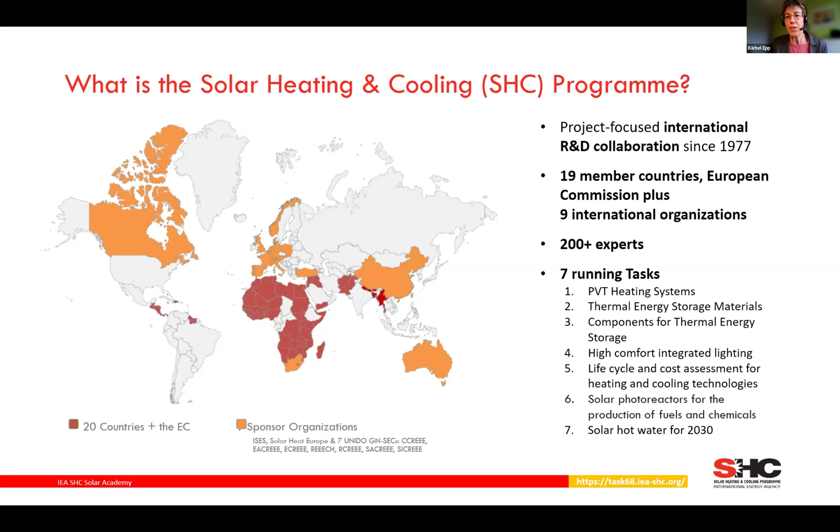Then we have a lighting task, also life cycle and cost assessment for heating and cooling technologies. And then a quite new one on solar photoreactors for the production of fuels and chemicals. And then the one which is today spending the time with us on solar hot water for 2030.

What is the Solar Academy? It's generally a platform which shares the findings and results from the research work, but it's not only reports that we publish, we also have training materials, often case studies, fact sheets, databases, and also tools, which are among the deliverables of the different research platforms.

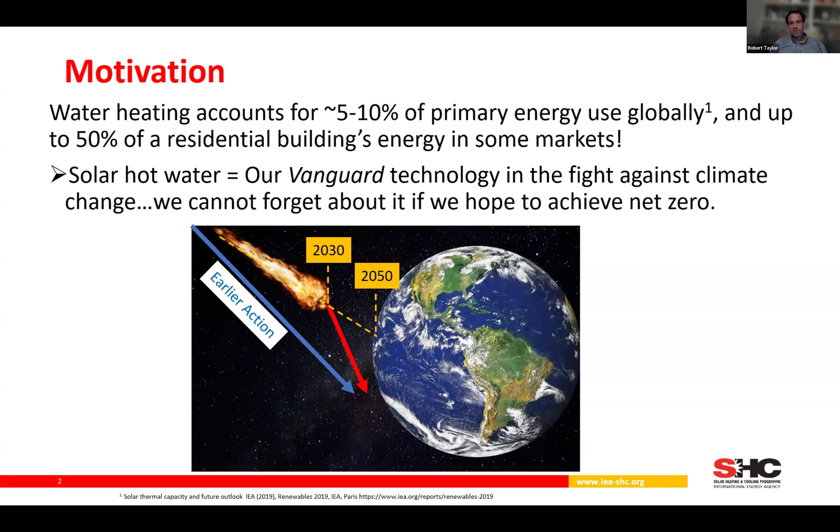If we wait longer and longer to start dealing with this problem... I've got a little asteroid-running-into-Earth picture there. The sooner we take action, the easier it is to change the trajectory. As we've gone along in the task, we've realized solar hot water has a lot of interesting applications, particularly when using photovoltaics to make hot water. There's some interesting interaction with other things—when you get to really high levels of photovoltaics on the grid, hot water is an interesting opportunity for storing excess PV electricity during the middle of the day and making sure it gets used rather than curtailed and turned off.

Another part of the motivation, and the reason we picked 2030 as our target deadline, is that it's pretty near term. There was an IEA report saying that if we want to get to net zero by 2050, we need something like 400 million dwellings around the world with solar thermal on the rooftop. Business as usual, unfortunately, for solar thermal technologies is starting to slow down a bit. So we thought, a couple years ago, this could be a good time to have a task to fill that gap and re-accelerate solar thermal and solar PV for hot water technologies.

At the same time, there are a lot of national and international targets that have something around the year 2030.

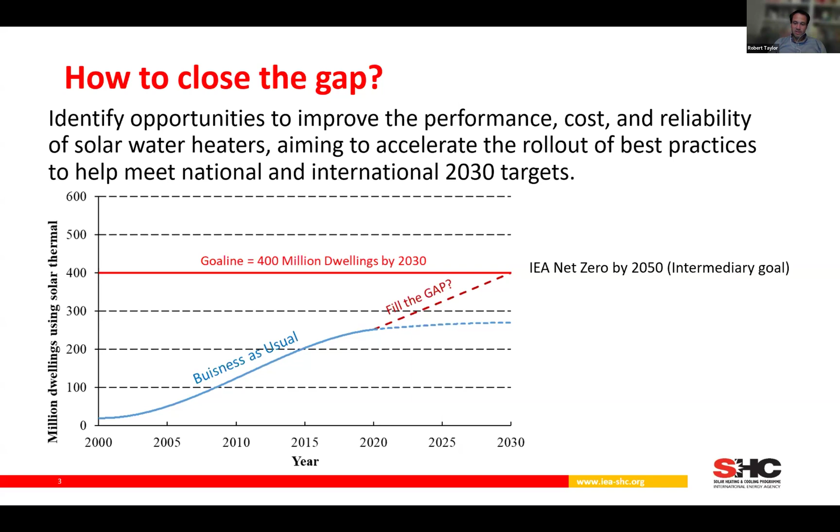So that's how we got going on this task. Basically the task focuses on two technologies. Of course, there are a few other options, but two technologies which we thought, and I still think are quite viable for now and into the future.

One is thermosiphons, where you don't need any pumps. You rely on the sun warming the water to pump the liquid. Basically, you get the density change of warming up water, which circulates the water through the system. Right now, that's basically the dominant type of solar hot water technology in the world.

Somewhere greater than 50% of systems are thermosiphons. And also PV hot water systems, which I'm sure we'll discuss in one of the talks later, come in all shapes and sizes, but are growing very fast. An interesting thing about PV hot water is it used to be a ridiculous idea to take your $100 a watt photovoltaic system and turn it into something as simple as hot water.

But now that PV is getting so cheap, in a lot of places you can install a system for much, much less than $1 per watt. It's starting to make a little bit of sense. And if you pair it with a heat pump or something, you can get back to similar efficiency as a thermosiphon. So both of these technologies were of big interest to us, and they have some similarities in that they don't require a lot of moving parts.

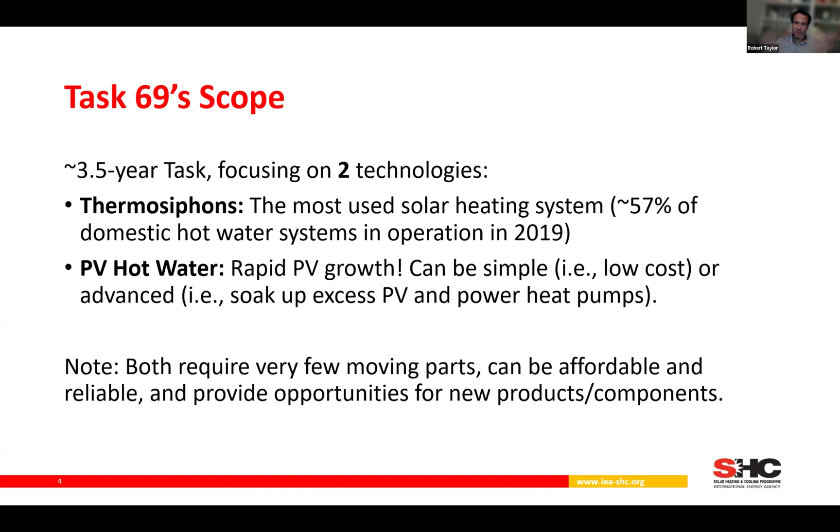They can now both be pretty affordable and reliable, and there's some interesting opportunities that might interest manufacturers to try to get some new products, components, smart systems, things like that, which I think will be discussed later as well a little bit.

And then whenever you think about where these kinds of solar systems are being installed, well, we've seen a little bit of a decline in the market in China, which used to definitely be the leader. But there's still quite a bit of growth for solar hot water in Sub-Saharan Africa and in other parts of Asia.

People are always going to need hot water. So anyone that's tried to take a cold shower will very much appreciate having some hot water in your house. But in terms of solar technology installation, there's a few key growth areas out there, and a few of the historic ones are slowing down a bit.

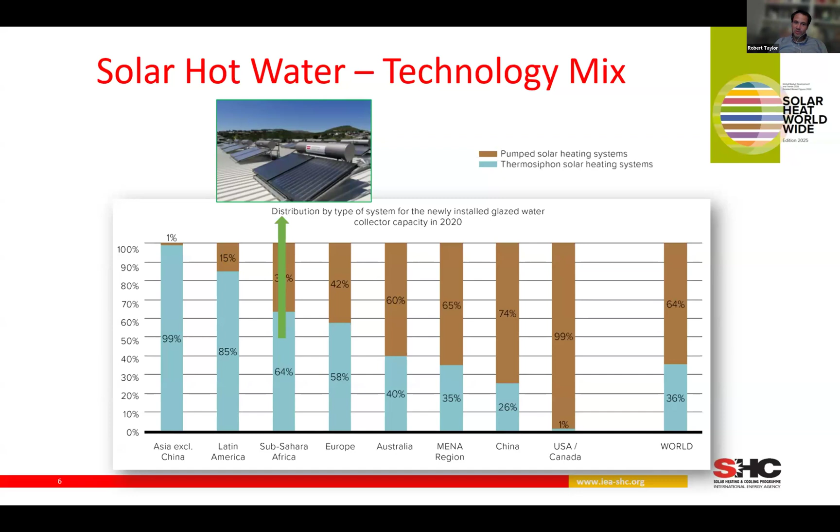In some of the other markets around the world, I'm not sure where everyone is joining from, pump systems can be more popular. That works well, of course, if you have a reliable grid where you can use electricity for pumping the water. But in places where maybe there isn't such a reliable grid, or where there's a lot of rural areas, thermosiphons are a good solution.

But another technology that's starting to come in there, and I just drew little red bars there, is PV hot water technologies. PV hot water can also work in places where there isn't a reliable grid, because PV can be off-grid, and there are ways—we'll talk about it later in the next presentation—to just have the PV dedicated to making hot water.

And also in places where there's a lot of PV on the grid already, like where I'm coming from here in Australia, there are places where the electricity price can go negative because we have too much PV in the summertime during the middle of the day. You can actually get paid to take electricity off the grid because there's so much solar. So those parts of the world are starting to see some growth.

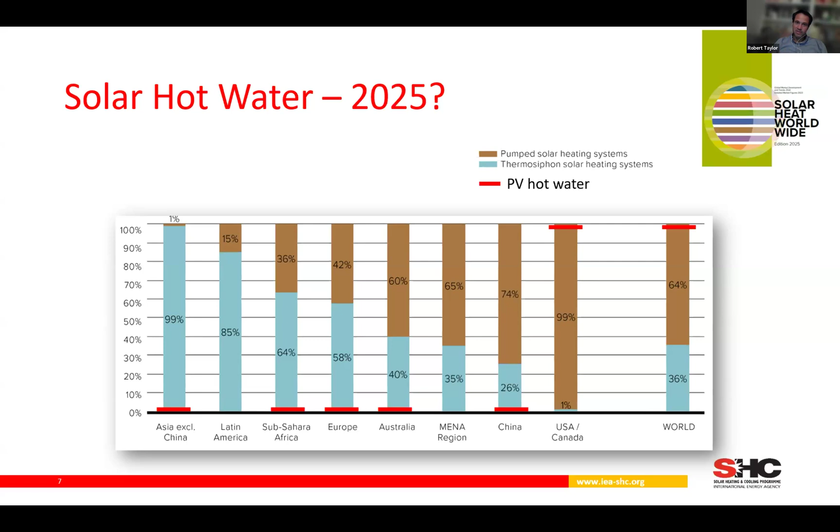Right now it's very small, just little bars there, but I think that's a technology that's going to grow a lot in the future, in the next few years.

So just a few other little points that were in the task that I think are interesting and worth discussing: one of the things that's ongoing, and we just recently got some live data from, is a comparison study at the Namibia Energy Institute, where they're looking at a PV hot water system, a flat plate thermosiphon system, and an evacuated tube thermosiphon system, all in the same location, all with similar energy outputs and the same storage tank size.

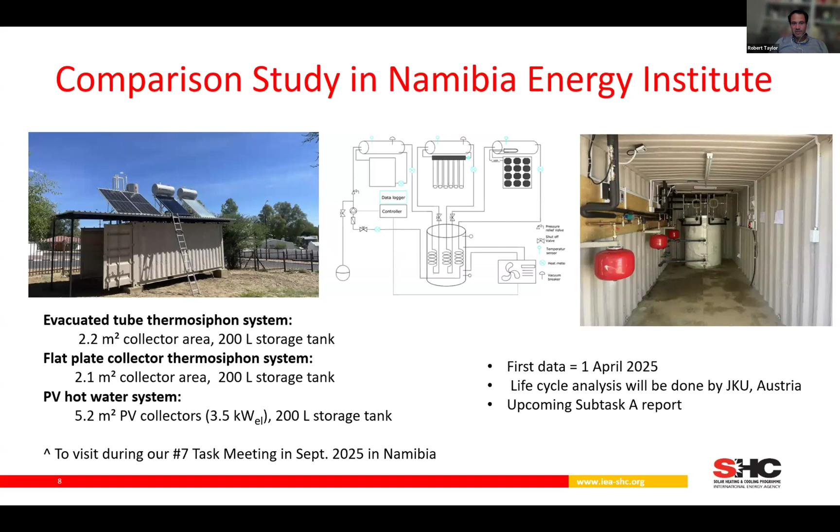And they're just now getting some live data from that. So it's kind of a nice experimental study that I was actually on the ground visiting last month in Namibia.

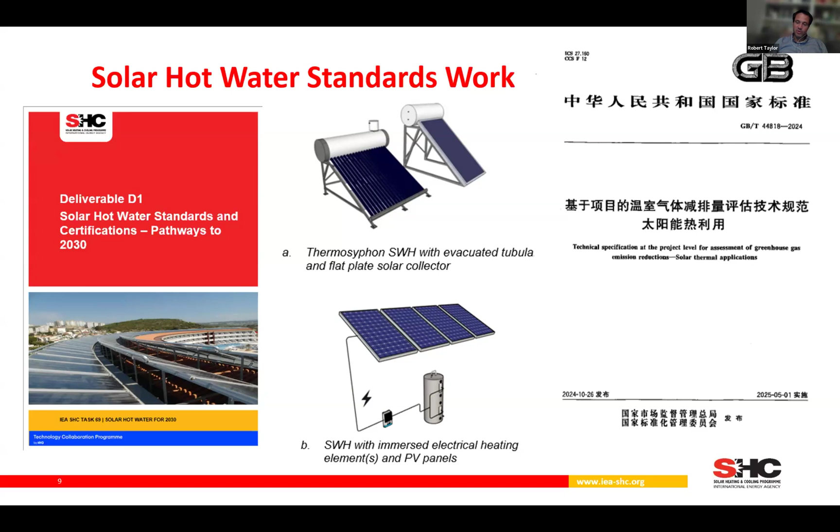We also had a bit of work on standards inside the task. There was a new Chinese standard, and we had a report on different standards and certifications from around the world, published on the task website. But there are quite a few configurations and standards around the world, and they don't always capture everything or line up. So there are some recommendations in that report about harmonizing standards and certifications.

Also in the task, we've done a little bit of training sessions and looked at some of the needs for training. We had some in-person trainings, and this Solar Academy also counts as a bit of training. We had a training session in China, and a training session just recently on that visit to Namibia.

In terms of what is needed for training, at both of those places we asked participants what they want to see more of. The top two things that came up were installation and commissioning of new solar hot water systems, which is covered quite well with some work associated with our task but predating us, the Solar Keymark project, Solar Keymark Plus, which has a lot of training inside of it. And the design and installation of heat pump systems was also interesting.

Overall, I learned a lot during this task. We have a few more months to go to get our final deliverables. One thing I've found interesting is that it really brought together a lot of people from different cultures, perspectives, climates, and kinds of markets. Solar hot water has a role to play, with different technologies and configurations, all around the world. There's demand for it and a way it can work economically and technically everywhere. Running this task, I had opportunities to visit experts all over the world, and we had some really nice meetings.

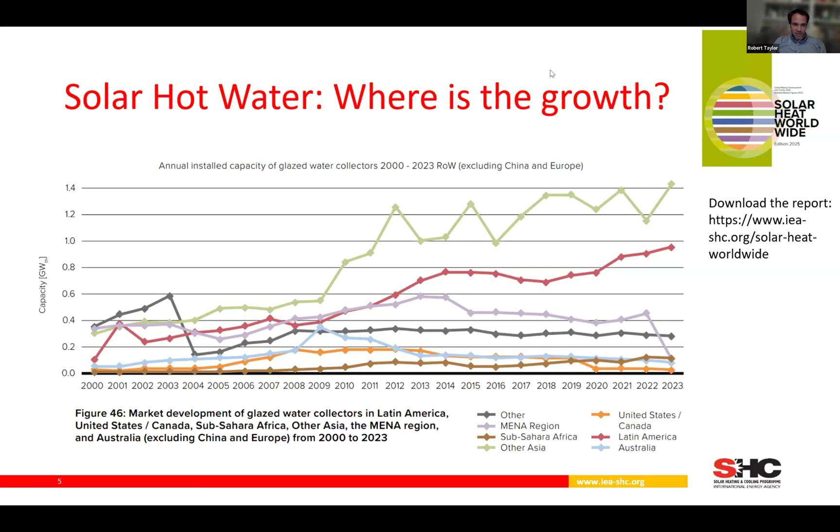Let me see. That's it, I hope. Yes. We go to the next slide.

Yes. So we have Dr. Bojia Li with us. He is also professor at the Solar Energy Application Center for the China Academy of Building Research. His research mainly focuses on solar thermal application and energy efficiency technologies in buildings. He holds a PhD in HVAC from Tianjin University, and he is contributing to the National Key R&D program, which is called Key Technologies and Demonstration on Zero Carbon Building in Solar Energy-Rich Regions.

And he has actually a long title of his presentation today. He will talk about global warming potential emission reduction testing in China for thermosiphon systems. So, Bojia, the floor is yours, and I'm looking forward to your presentation, and stop sharing.

Thank you. And I will share my slides. Okay. Yes. Perfect. So maybe there are some small mistakes.

My presentation title is greenhouse gas emission reduction testing for thermosiphon systems in China. I'm Li Bojia from China Academy of Building Research. As just introduced, I joined the IEA SHC Task 69. I'm the subtask leader of subtask B for thermosiphon systems. Today, I want to share one of the important outputs from subtask B, about emission reduction testing for thermosiphon systems in China.

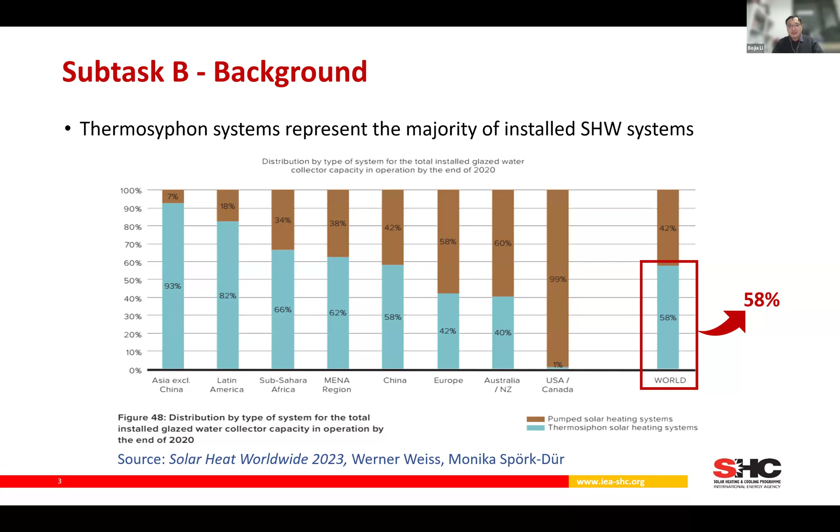There are 4 main parts of my presentation. First, subtask B is mainly focused on thermosiphon systems. Although the thermosiphon systems market has dropped in most markets in the whole world, they still represent the majority of installed solar hot water systems. Through this subtask, we want to promote thermosiphon systems in the whole market, by 3 methods.

First is to investigate new systems improving convenience and performance to get better design or management technologies. Until now, we gathered a lot of interesting new innovations on thermosiphon systems, such as smart control systems, cloud maintenance systems, and new materials for thermosiphon systems. They are all gathered in our deliverable B1.

The second goal is to investigate the failure modes and effects in different regions, mainly in African countries, and to find ways of improving durability and reliability. The main failure modes and effects were already presented in the last Solar Academy. So today I want to share the third one, which is to investigate the energy saving and emission reduction performance of thermosiphon systems.

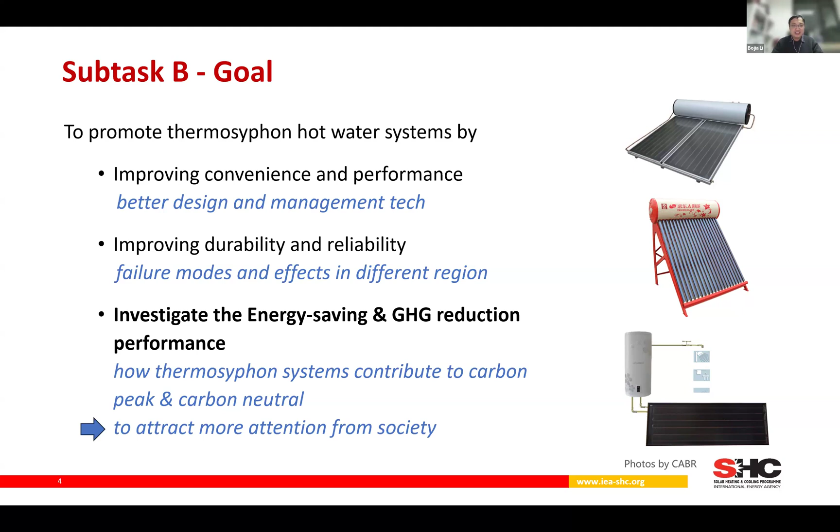We want to tell the whole public how thermosiphon systems contribute to the carbon peak and carbon neutral goals. And we want to attract more attention from society, to tell them we are making a big contribution to carbon emission reduction. So that's our initial motivation for this subtask and this part of research.

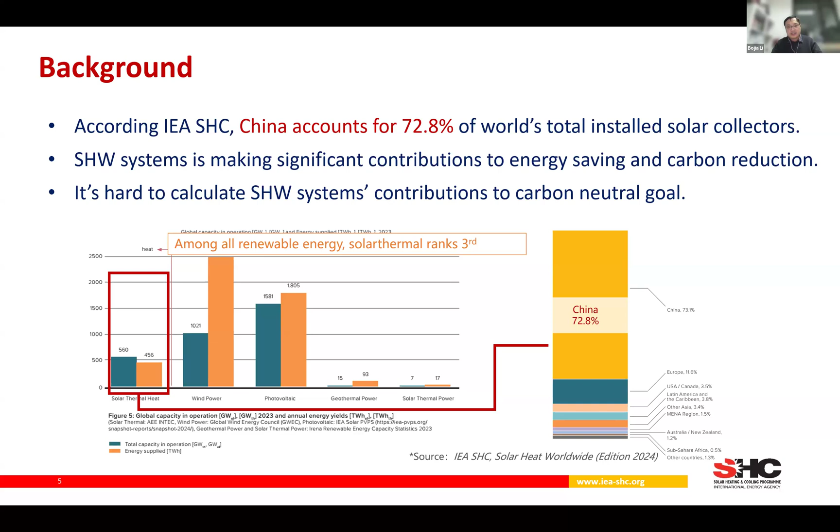The background is that China accounts for about 73% of the world's total installed solar collectors, and as I just said, thermosiphon systems or solar hot water systems are making a significant contribution to energy saving and carbon reduction in China. But it's very hard to calculate solar hot water systems' contribution to the carbon neutral goal, because China lacks an emission reduction assessment method for solar hot water systems.

There are China's own certified emission reduction methods, but only 4 methods published. One is about solar thermal power generation. The others are about carbon sinks for forests, grid-connected offshore wind power generation, and mangrove forest construction. None of them is relevant to solar hot water systems.

For international methods, there is the Clean Development Mechanism, mainly developed by the United Nations, and there is one method for solar water heating systems, including 3 ways: first is system simulation, second is system metering, and third is stipulated energy saving. They give a constant annual solar yield for solar hot water systems of about 450 kilowatt hours per square meter of collector.

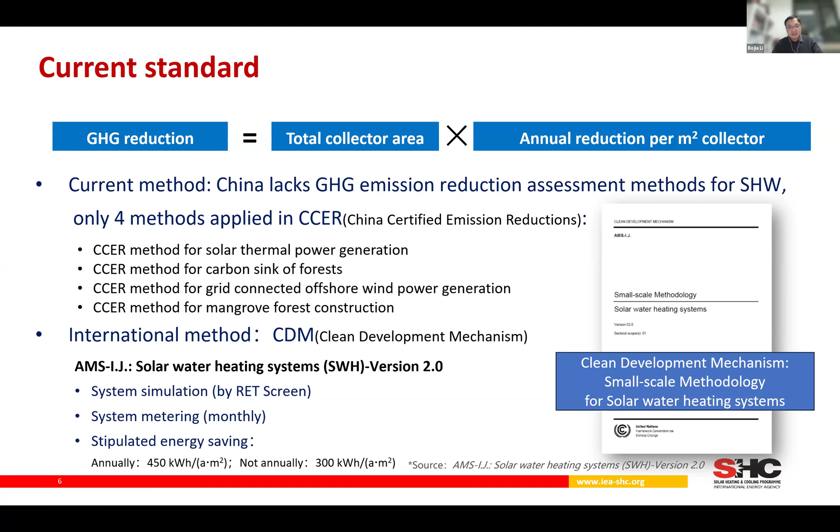We think this method is also not quite suitable for the Chinese situation, because there are a lot of differences between China and Europe and the US in hot water systems, and that may cause differences in emission reduction. For example, China has a lot of different cities.

They have a lot of different, very different solar resources. For example, in Beijing, the annual solar irradiation is about 1,000 to 1,500 kilowatt hours per square meter. But in Tibet, there may be more than 2,000 or even 3,000 kilowatt hours per square meter of solar irradiation. So the solar resource is very different in different places. That means you will get very different emission reductions with the same solar thermosiphon systems.

Another is the system type. In China, this compact system takes the majority of thermosiphon systems. It uses evacuated tubes and a water tank, integrated together to provide hot water. And the hot water demand is very different because there are a lot of high-rise apartment buildings in China, and the government used to force buildings to install solar hot water systems. So you can see a lot of this type, flat plate balcony systems installed in high-rise apartment buildings. Therefore, we think other countries' experience is maybe not quite suitable for emission reduction in China.

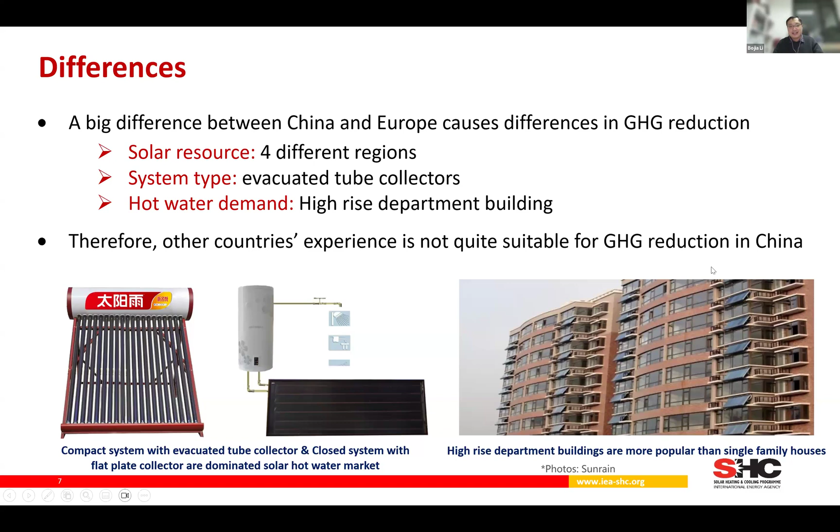So we started our research to build a method to assess the carbon emission reduction for solar hot water systems and tell the public how much carbon emission reduction solar hot water systems could provide for society. To ensure the reliability of the method, the research includes four parts. First, we generate a main procedure to evaluate the emission reduction performance for solar hot water systems. ISO 9459 Part 2 gives the testing method and long-term calculation methods for solar yield. For example, we can calculate how much solar yield one solar thermosiphon system could get through one year. Then we could convert it into carbon reduction with a carbon factor. I will talk about it later.

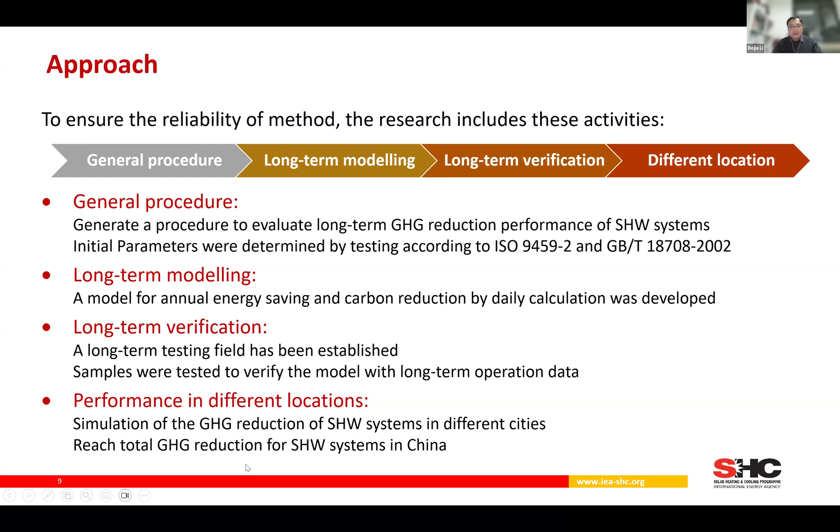Then we make long-term modeling. We model annual energy saving and carbon reduction by daily calculation. This modeling procedure mainly follows the way used in ISO 9459 Part 2, but we make a little adjustment to make it suitable for the compact system, the most popular system in China. Then we did long-term testing to verify the model with operation data. Then we do simulations for solar hot water systems in different cities in China, because China has a lot of different cities with quite different solar resources. And then we reach the total emission reduction for solar hot water systems in China.

The general procedure is mainly three steps. First, individual samples of solar thermosiphon systems should be tested in the laboratory according to ISO 9459 Part 2 and Chinese national standard 18708, to get the main characteristics of the system, mainly the solar yield, heat losses and the drain water temperature curve. The little difference is for the compact system in China. It's an open loop system. So when you drain out the water from the tank, the temperature remains the same, as no cold water is added. So you could only drain out about one times the tank volume of water during this step.

So we took these two standards. This is for the compact systems, and this is for other types of system. Then we calculate annual energy output and saving with the software, because we must get the annual energy output through daily calculation. We calculate everyday solar yield and everyday heat losses, and we give a daily water use curve to simulate the water usage. The method is very similar to ISO 9459 Part 2, but you have to calculate 365 times a year. So we developed a small software to make it easier.

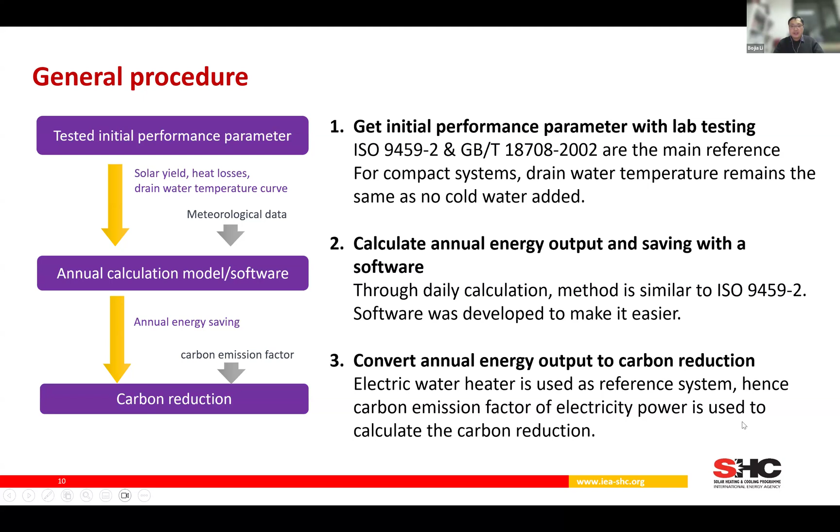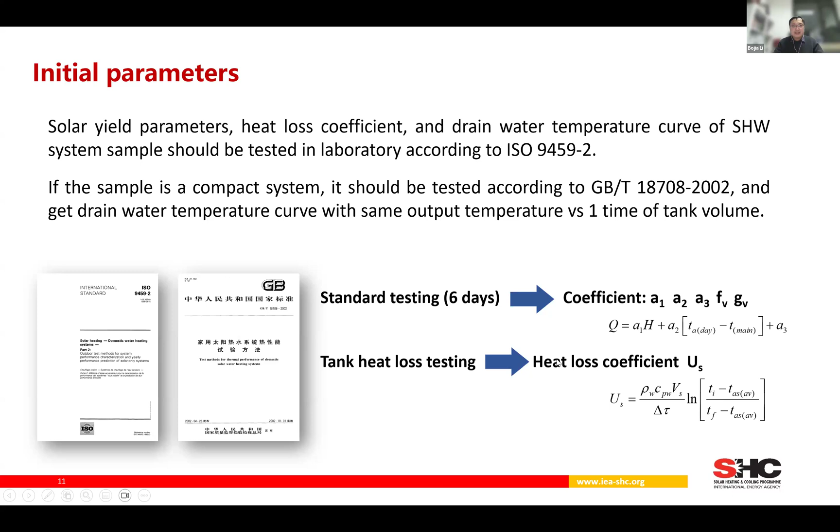Then when you get the annual energy saving, you could convert annual energy output to carbon reduction. In the research we use an electric water heater and a gas boiler as reference systems. But for the testing we use the electric water heater as the reference system, and the carbon emission factor of electric power is used to calculate the carbon reduction. I will talk about it later in detail. For the initial parameters, these key parameters could be tested in the laboratory according to ISO 9459 and Chinese national standard 18708. Then you get these characteristics and input them into our testing model. We made a small calculation software, and you input that.

The software will calculate the whole annual solar yield and carbon reduction automatically. This is the main calculation procedure. I think it depends on the time. I don't have enough time to introduce it in detail, but maybe you could look at that later.

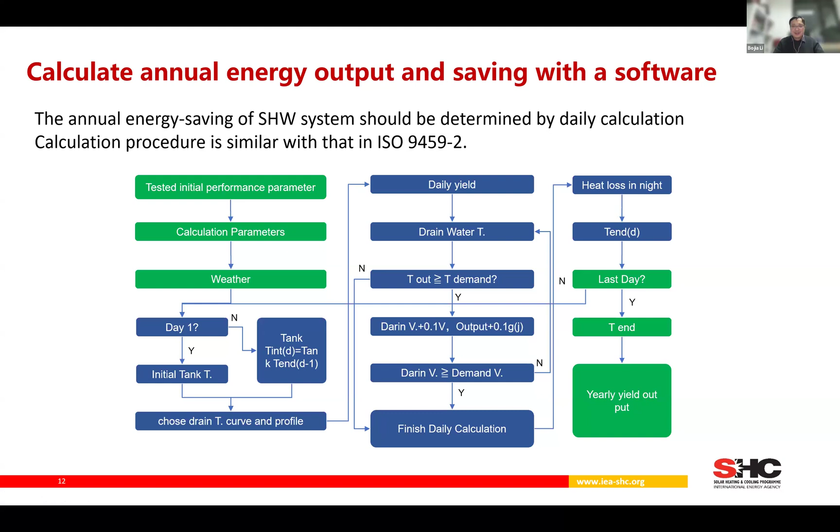And for the convert to carbon reduction stage, as I just told, the emission reduction of solar hot water systems could be calculated with the following equation. Generally it's about the baseline emission and the project emission, and if you have the testing or calculated solar yield per year, you could multiply by the baseline carbon factor and then divide by the baseline efficiency.

The efficiency means the energy efficiency of the electric water heater or gas boiler. According to Chinese national standards, the energy efficiency for an electric water heater must be no less than 0.95, and for the gas-fired boiler must be no less than 0.86. And for the carbon factor for electricity, we usually use 0.5 kilograms carbon dioxide per kilowatt hour.

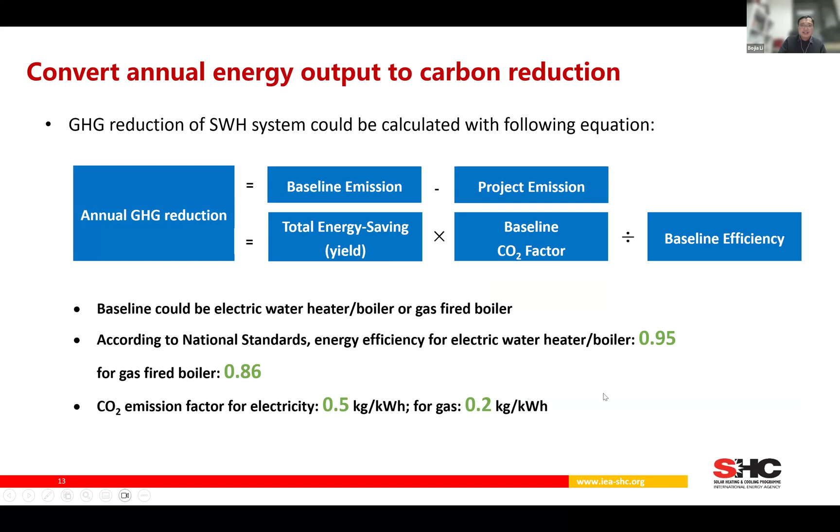And for the gas, maybe this is more fixed, and it's about 0.2 kilogram carbon dioxide per kilowatt hour heat. Okay, that's all the assessment method part.

And then to verify the calculation model and the calculation procedure, we built a carbon reduction testing field in Jiangsu province with the help of Solareast company. And this is also a part of the output from our subtask B. And this is a view of the testing field.

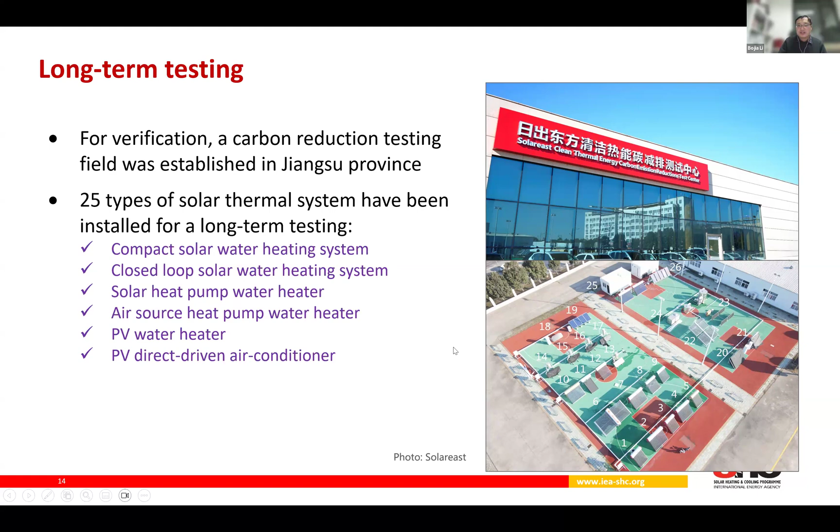There are 25 types of systems, not only solar thermal systems, all the thermal systems have been installed for long-term testing, including the solar hot water systems, and also the PV water heater and PVT systems and some heat pump systems. But we only use the solar hot water systems for verification. We mainly use these two kinds of system.

One is the compact system or open loop system, and this is the most popular system in China. 10 samples have been tested, and the average daily energy saving is about 2 to 4.7 million joules per square meter. And the average daily emission reduction is about 0.33 to 0.75.

And about five systems have been tested, and the average daily energy saving is about 0.8 to 2.3, and the emission reduction is about 0.14 to 0.5. You could see the pressured system or balcony system is less than the compact system. That is because this is mainly designed for balconies of high-rise buildings, and the slope of the collector is not quite as good as the compact system.

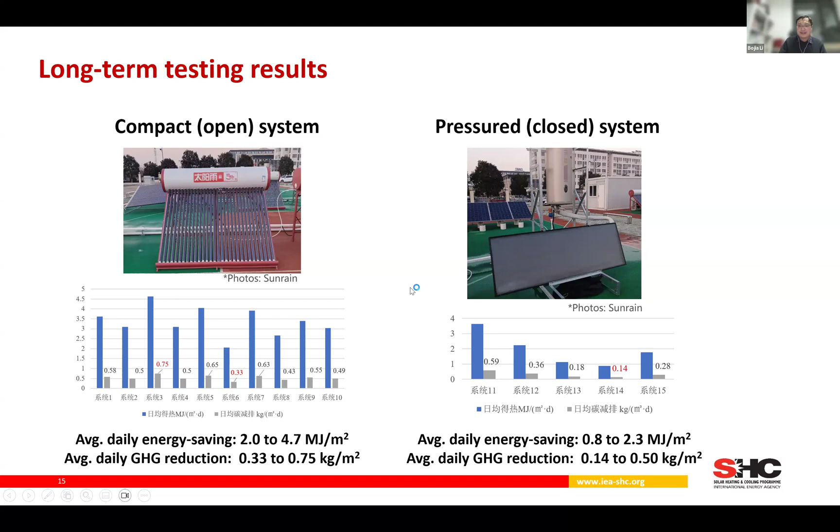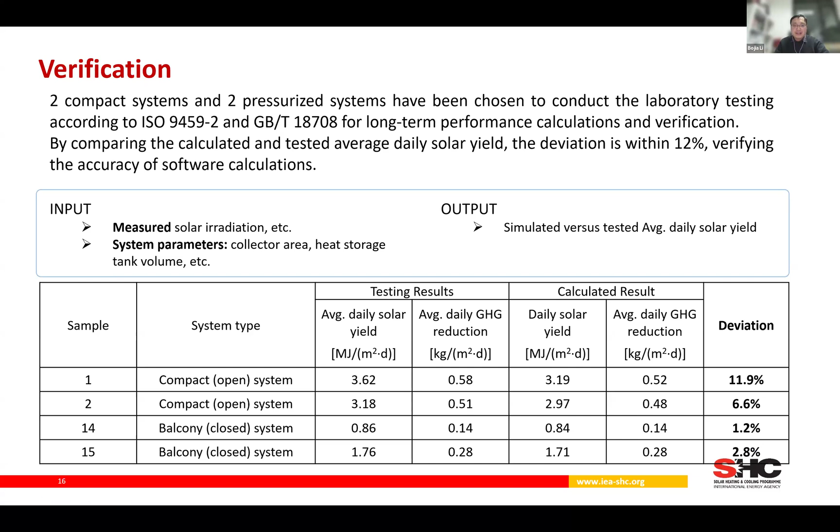And then for the verification, we input measured solar irradiation weather data and system parameters to the software we developed, and we compared the calculated solar yield and the tested solar yield, and we could see the deviation is about 10%. We think our method is accurate enough to evaluate individual thermosiphon systems' emission reduction.

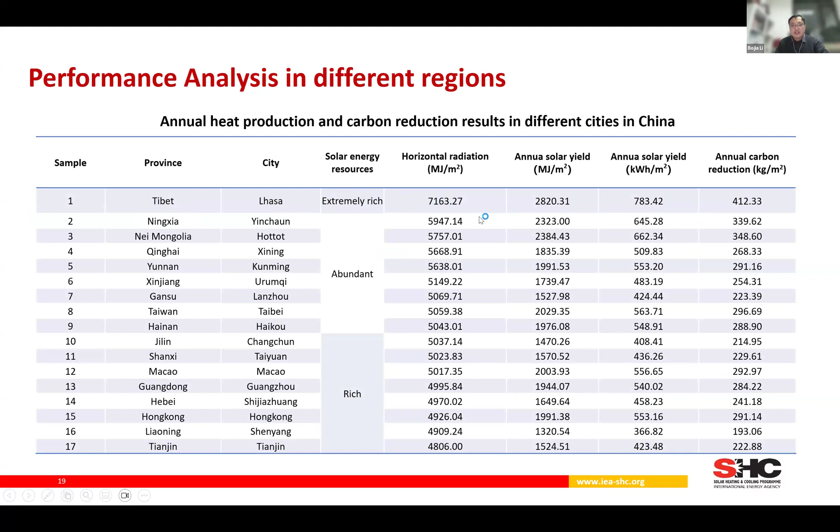The extremely rich resources are more than 7,000 million joules per square meter per year. And the worst solar energy resource is in Chongqing. They have only about 3,000 million joules per square meter per year, and it's less than half of Lhasa in Tibet.

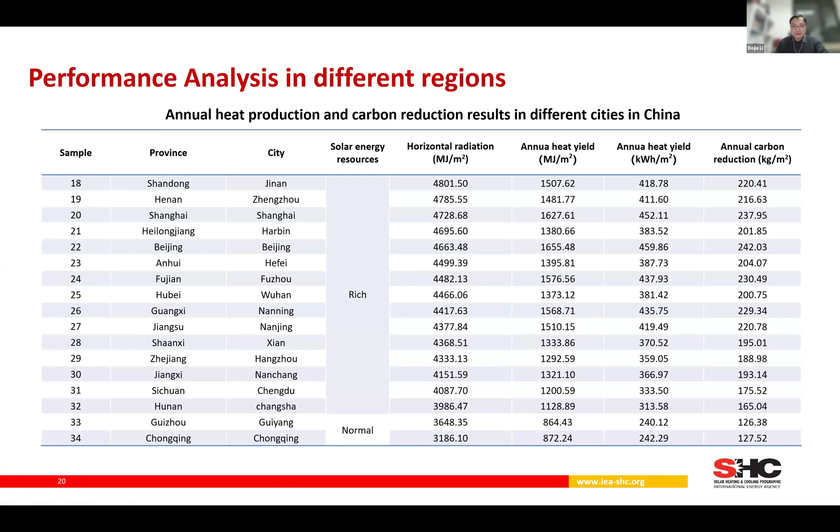And when we get the solar yield and emission reduction for each city or each region, we think this city could be on behalf of this province, and to get an average figure for the whole country, we use this figure weighted according to the population of each province.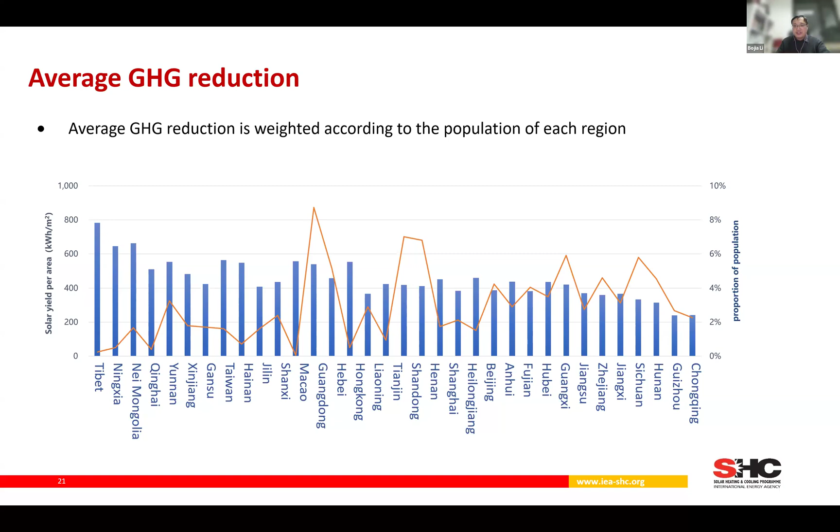That is, we think in China almost every family has solar thermal systems. So the city with more people, the solar thermal systems will be more. So that will reflect how many systems have been installed, and then we get the final figure: the average solar yield for solar thermal systems in China is about 420 kilowatt-hours per square meter, maybe less than the figure in the CDM method.

And the average emission reduction is about 97 to 220. This figure is different because this one is compared with a gas boiler, and for this figure the reference system is electricity, because in China we can see electricity has a larger carbon factor compared with a gas boiler.

And then if we take the Solar Heat Worldwide figure into calculation, the total annual emission reduction is about 50 to 120 million tons of carbon dioxide in China. So Chinese solar thermal systems now contribute about 1% of the Chinese total emission, and we think this could tell society our solar thermal is contributing a lot to the carbon neutral goals.

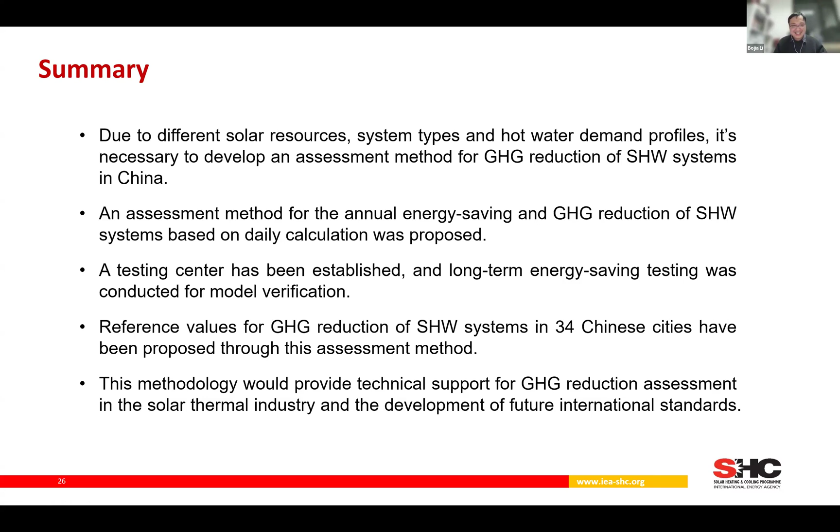Yes, yes, that's okay. Sorry. Thank you very much for the interesting talk. Yeah, if you invite professors, you have long speeches.

That's clear. But it was a very interesting insight into what China really contributes. And I think it's important to really figure out this contribution, as you are the largest solar thermal market worldwide.

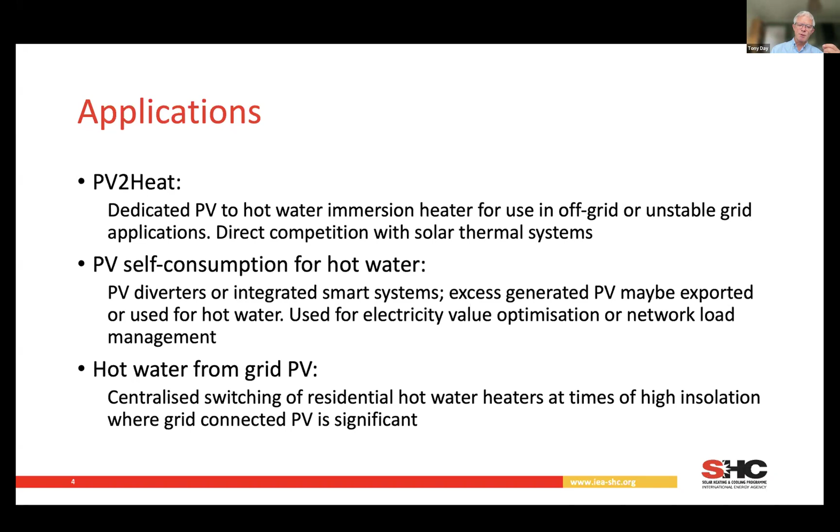And then finally, this idea of hot water from grid PV. We're now seeing a large growth in some countries of grid-connected PV systems, and I'll talk about this a little bit later on. And there are options and possibilities for centralized switching of residential water heaters, so you can actually divert electricity into the residential hot water tanks. So you've actually got a large thermal battery that you can start playing with for grid management, and we'll see why that's important.

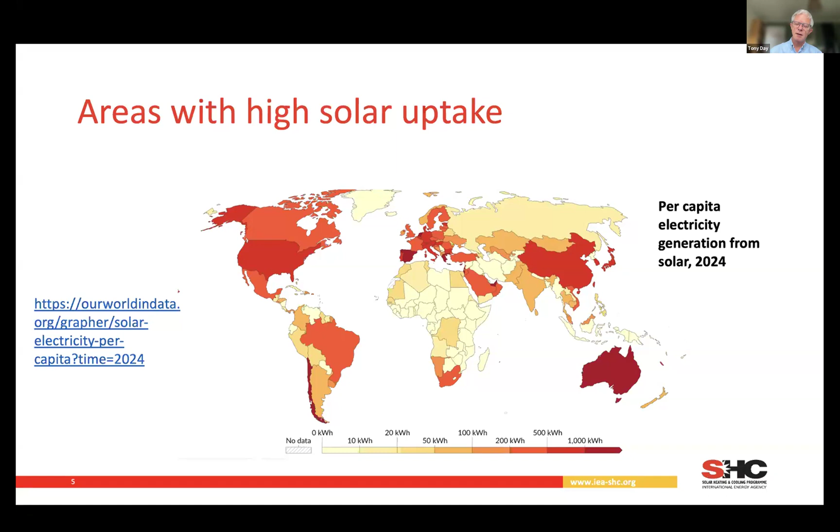So where is this going to happen? Well, those different applications will be different for the different circumstances. For example, those areas in dark red have the highest per capita solar uptake around the world. This is PV uptake. So there are huge opportunities where you have a large amount of rooftop systems of saying, well, why can't we just use that electricity? If we have excess electricity, maybe we should use that for heating hot water. So that's one option.

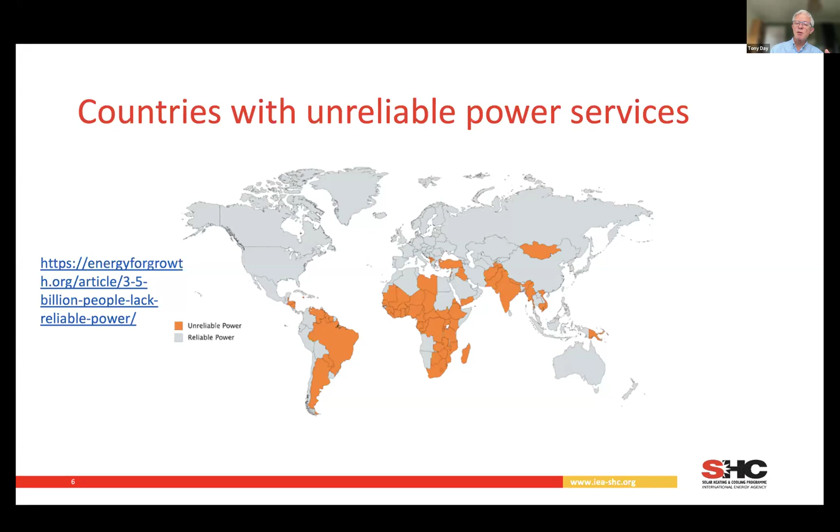But then there are a number of countries around the world where grid electricity is perhaps less reliable, less stable, and it makes less sense to have an interconnected grid system with your PV rooftop, and you may have much more autonomous systems. In which case, you want to heat your hot water directly, or you might want to heat hot water and power domestic appliances, in which case you need to go for smarter systems. In some cases, these countries overlap those two different types of markets. So it's a complex situation of where PV can work. So we'll get a brief look at those technologies. PV to heat.

This technology is still developing because you want the most efficient system. For example, having maximum power point tracking is necessary to properly match the variable output of the PV depending on the solar radiation available, and match that to the optimum requirement of the heater elements. So these systems need to be a little bit smarter than just having an inverter or even direct current into the resistance heating.

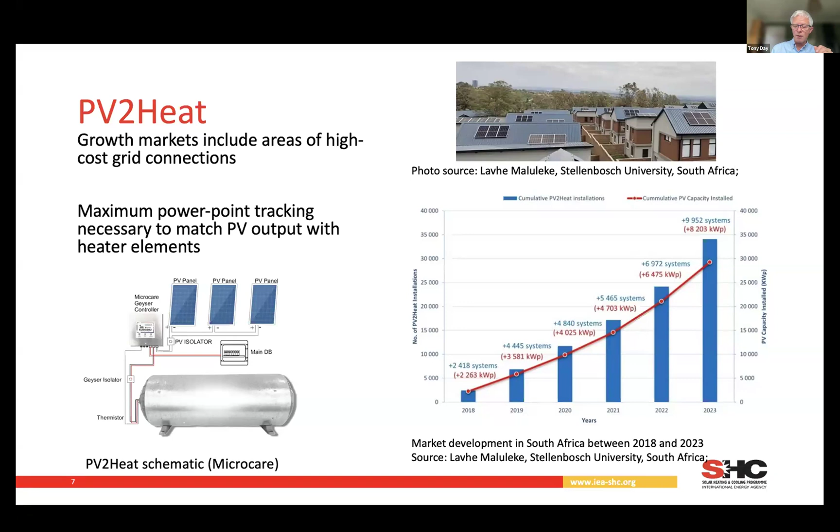So the other option here is where the electricity markets have probably more stable, more mature electricity grids. For example, in the UK, we may have hot water storage, grid connected, PV on the roof, and we will decide whether we're going to use the electricity from that PV to run our appliances, to export to the grid, or if we have surplus, we can divert that to the hot water storage tank.

There is a big resistance in countries such as the UK to do that, where we typically heat our hot water from natural gas systems, and the idea that gas is so much cheaper than electricity. So you would need an additional system if you're going to have PV diverters to heat the hot water tank. Well, it's not such a problem, because all of those gas water tanks will generally have a backup electric immersion heater. So it's actually very easy to fit these PV diverters into existing systems, and right across Europe, that's where the market is, and also in Australia, that's where the market is for these kind of technologies.

This example that I put here of the company Mixergy, in fact, goes one step further, and they have a smart hot water tank that can actually manage the state of thermal charge of the tank. So you can actually start to optimize whether your electricity goes into the tank, to the grid, or into the house, and how much hot water you're likely to need in the coming hours, and you can start to have much smarter control. So that's a really interesting adaptation of these technologies, making them much more attractive where you have growth of PV systems.

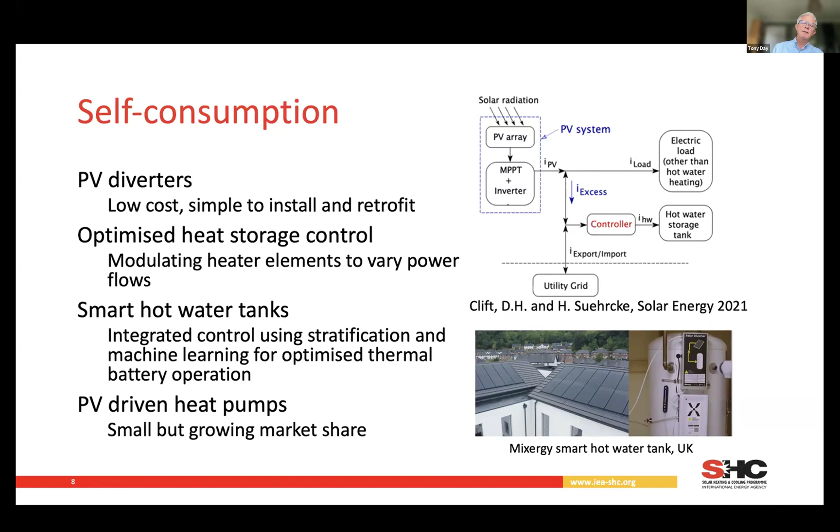We can have the PV output drive heat pumps, and in Germany there is a growth in that market. We haven't seen it, for example, in the UK. It is more sophisticated to do that, and generally you need a good amount of solar radiation year round to enable that to become much more cost effective. In the UK and Ireland, where it's cloudy most of the winter, that's not a very effective solution necessarily.

And then we come to grid PV to heat. This is a really interesting issue that is becoming apparent to a number of countries right now. In Australia, where there is a high amount of PV rooftop market penetration, there is also a large amount of solar grid PV as well. These things can be in competition, because the solar rooftops are taking load, taking business away from the centralized grid. And this is also beginning to happen in the UK.

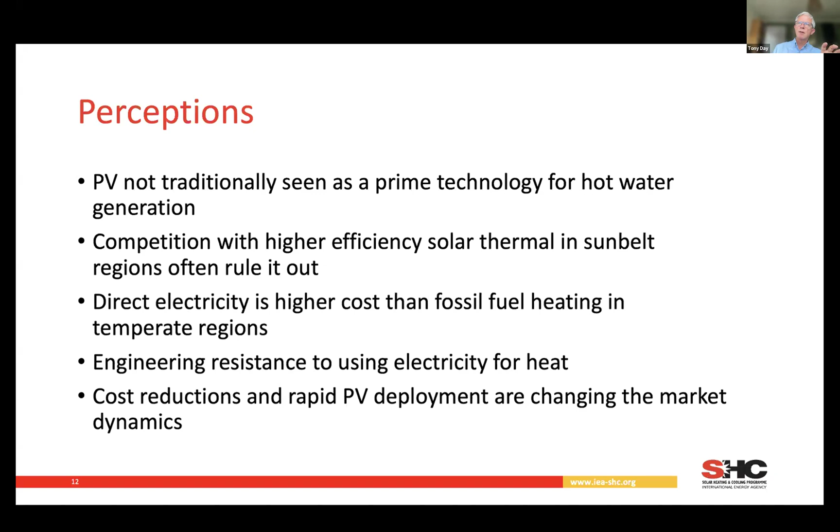And the cost reductions and rapid PV deployment actually are now changing the market dynamics. So things are moving. And one of the things that we're really interested in is how the policy and regulation space needs to actually keep up with the pace of change of technology. And I said earlier on, we're now undertaking a piece of work to understand what that policy landscape looks like.

It's actually very difficult to identify specific PV to hot water regulation, but it's buried in a lot of existing policy. In the UK, buried in the new forthcoming building regulations, for example, it will be very difficult to actually meet those regulations if you don't put in systems that have zero carbon hot water heating strategies. And in the UK, that will probably have to be PV. So these technologies may, in some markets, actually become almost mandatory.

So currently the evidence, it's limited around what policy instruments and regulatory instruments there are out there. But there are a number of them, as I say, they're buried within renewable energy mandates, and that needs to be brought out, and for policymakers to understand the opportunities.

So we see PV hot water systems, they're seeing significant growth. The application and uptake, they depend on climate, the electricity system maturity, and the PV market penetration rates around the world. So PV hot water can be lower cost than solar thermal, because of that reduction in hardware price.

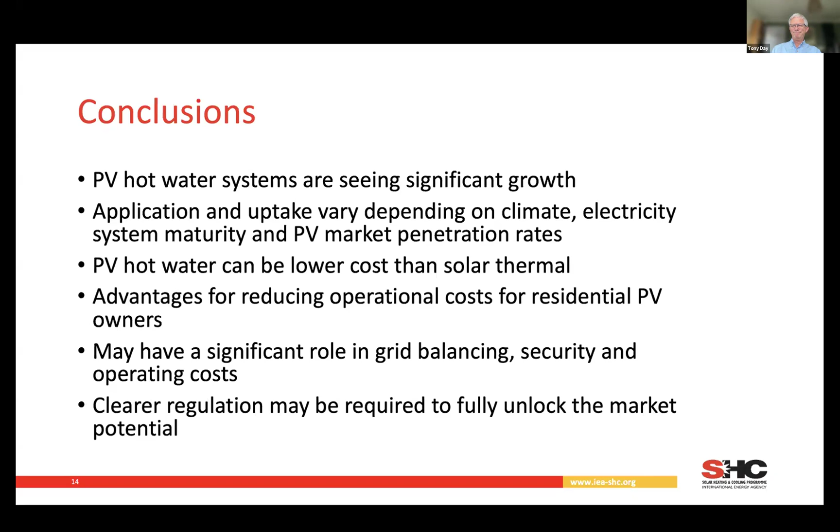Excellent, Tony. This was a complete shift away from thermosiphon traditional markets to modern smart PV to heat markets in the UK. Yeah. So thank you all together, and bring up your cameras now.

We start with the Q&A, and we have some really challenging questions. And I would like to start with the more general ones. And this was one of the latest ones asking us for whether you have ever done a calculation on the carbon footprint of PV and solar thermal. Was there anything done in task 69?

Shall I start? Yeah, sure.

Not directly for PV hot water systems, but I do think that because this area is fast moving, there may well be a need for future research to understand what those full life cycle carbon issues are. But that hasn't been done yet.

Can I add one thing? There's quite a range of PV hot water technologies. The one where you just have PV, a little bit of electronics, a maximum power point tracker, and then direct to a resistance heater, that's pretty low carbon emissions. That's got to be competitive or better than a thermosiphon system. But if you start adding a heat pump and a bunch of other moving parts and a smart tank, then it's going to take longer to pay back, because of the embodied carbon in all those bits of equipment.